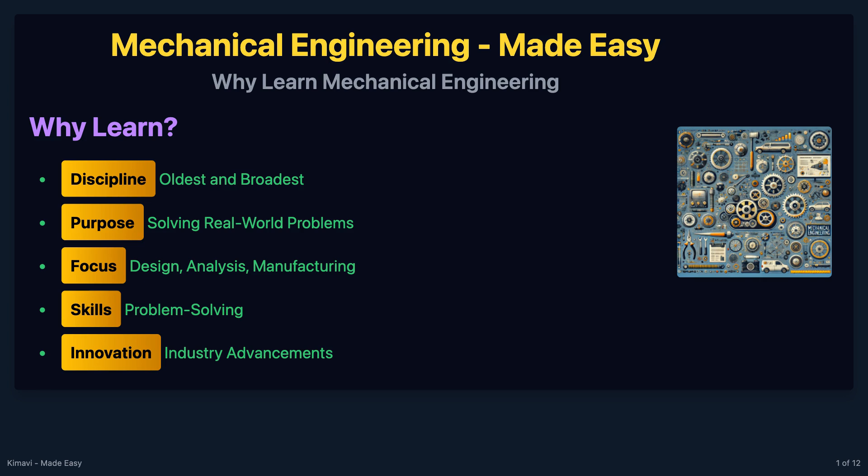Why learn mechanical engineering? Mechanical engineering is one of the oldest and broadest engineering disciplines. It helps us solve real world problems through the design, analysis, and manufacturing of mechanical systems. By learning mechanical engineering, students gain problem solving skills, understand fundamental concepts, and explore innovations that drive industries like automotive, aerospace, energy, and healthcare. In this chapter, we will explore an introduction to mechanical engineering, its real life applications, career opportunities, fundamental concepts, problem solving skills, and the importance of innovation and creativity in this field.

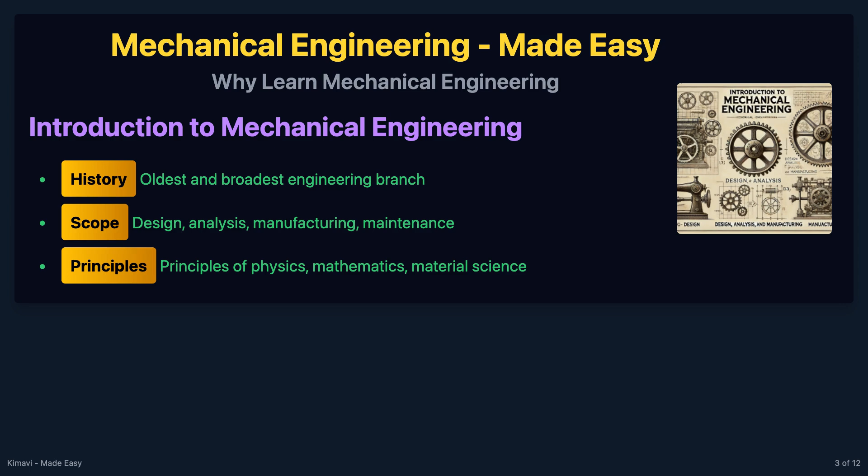Mechanical engineering is one of the oldest and broadest branches of engineering. It involves the design, analysis, manufacturing, and maintenance of mechanical systems. Mechanical engineers use principles of physics, mathematics, and material science to create and improve products and processes.

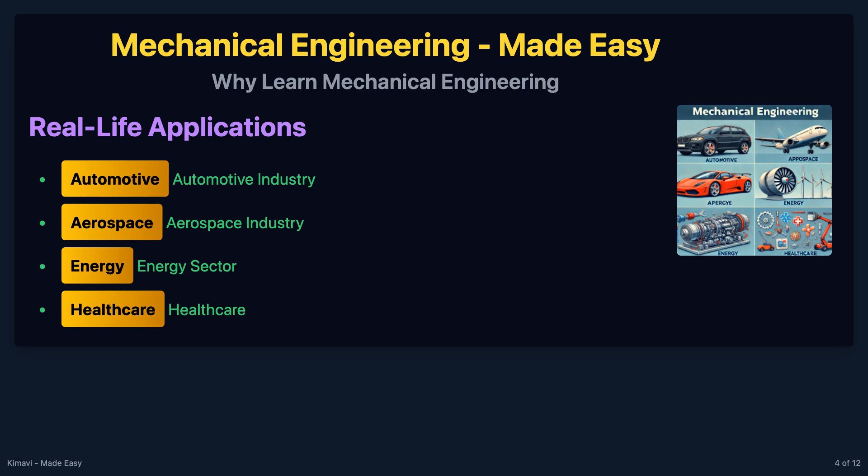Mechanical engineering impacts various industries and everyday life. For example, in the automotive industry, mechanical engineers design and develop vehicles. In the aerospace industry, they contribute to the design and manufacturing of aircraft and spacecraft. In the energy sector, they develop renewable energy sources and traditional energy systems. In healthcare, they design medical devices and equipment to improve patient care.

A degree in mechanical engineering opens up a wide range of career opportunities. Mechanical engineers can work in various industries, including automotive, aerospace, energy, manufacturing, and healthcare. Common job titles include design engineer, manufacturing engineer, research and development engineer, project manager, and quality control engineer.

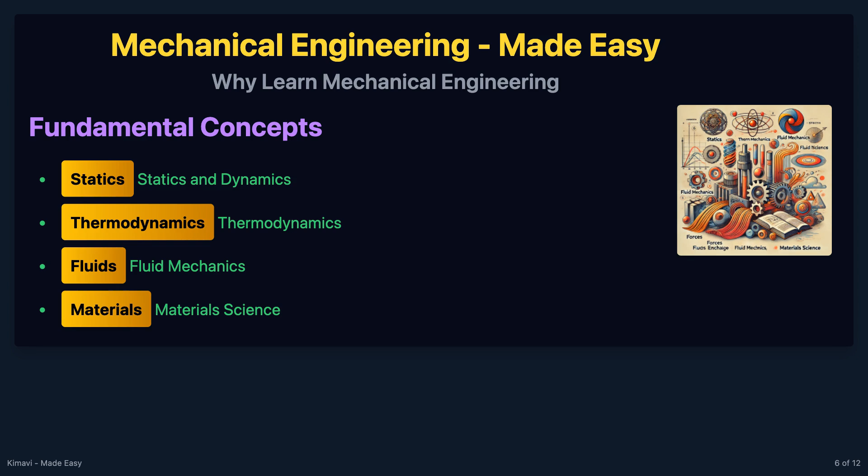Mechanical engineering is built on several fundamental concepts. Statics and dynamics involve the study of forces and motion in mechanical systems. Thermodynamics is the study of energy, heat, and work. Fluid mechanics focuses on the behavior of fluids, and materials science involves understanding materials and their properties.

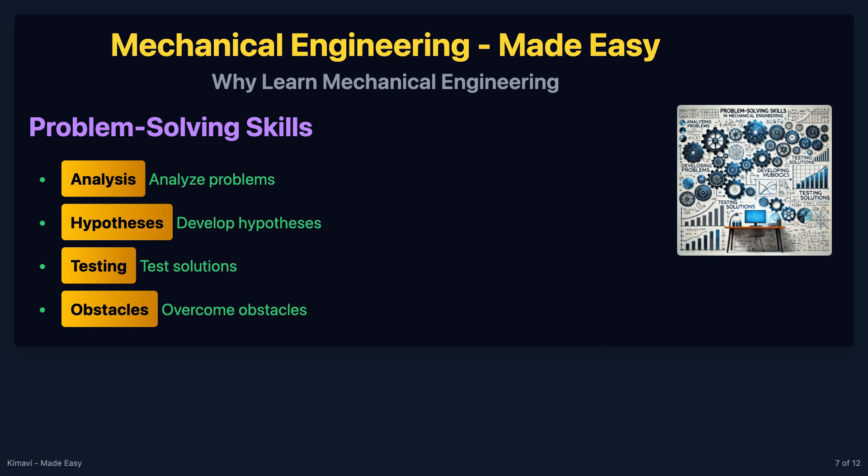Mechanical engineering teaches valuable problem-solving skills. Engineers often face complex challenges that require innovative solutions. By learning to analyze problems, develop hypotheses, and test solutions, mechanical engineers become adept at overcoming obstacles and improving systems.

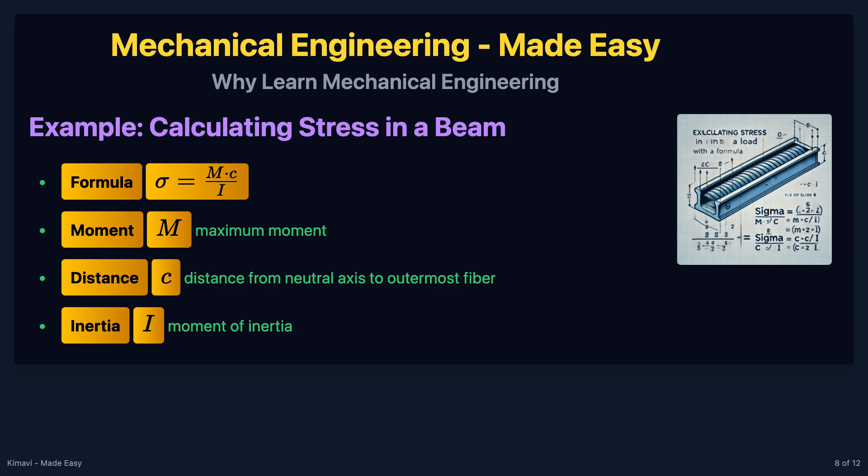Consider a simply supported beam subjected to a uniform load. The maximum bending stress, denoted as sigma, in the beam can be calculated using the formula sigma equals M times c divided by I. Here, M is the maximum moment, c is the distance from the neutral axis to the outermost fiber, and I is the moment of inertia of the beam's cross-section. This formula helps engineers ensure that beams can withstand applied loads without failing.

Mechanical engineering fosters innovation and creativity. Engineers are constantly developing new technologies and improving existing ones. From designing more efficient engines to creating advanced robotics, mechanical engineers drive progress and contribute to technological advancements.

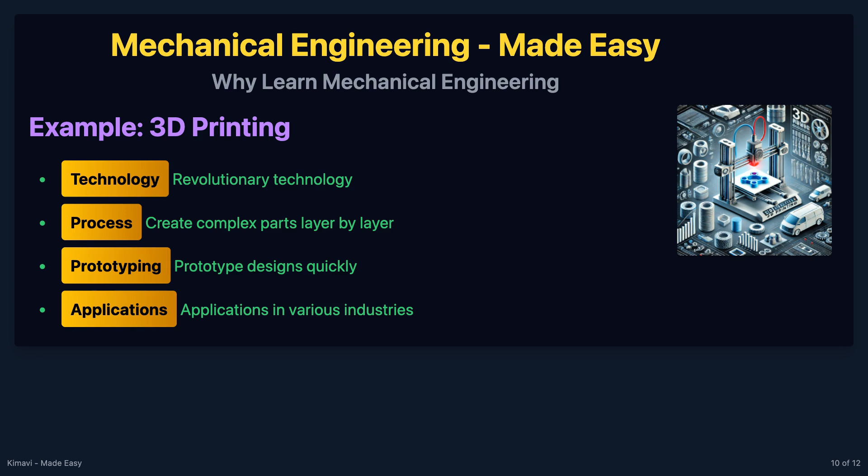3D printing, or additive manufacturing, is a revolutionary technology that allows engineers to create complex parts layer by layer. Mechanical engineers use 3D printing to prototype designs quickly, test new ideas, and produce custom components. This technology has applications in aerospace, healthcare, automotive, and many other industries.

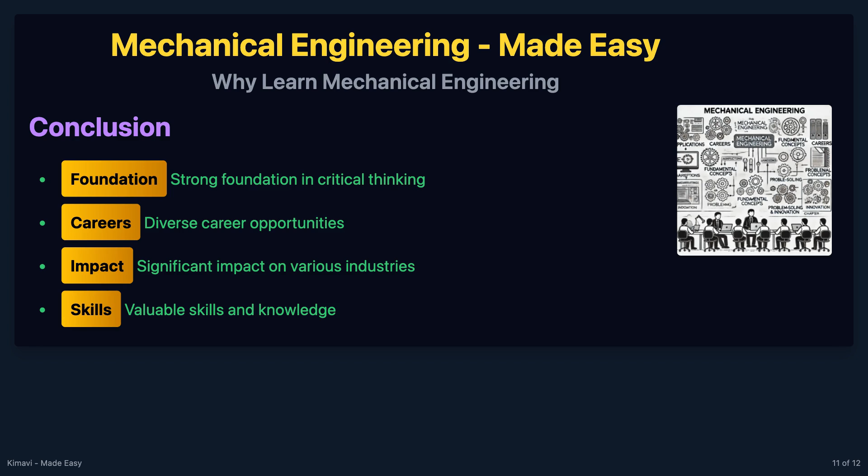Learning mechanical engineering provides a strong foundation in critical thinking, problem solving, and innovation. It offers diverse career opportunities and the chance to make a significant impact on various industries and everyday life. As you embark on your journey as a mechanical engineering student, remember that the skills and knowledge you gain will be valuable assets in your future career.